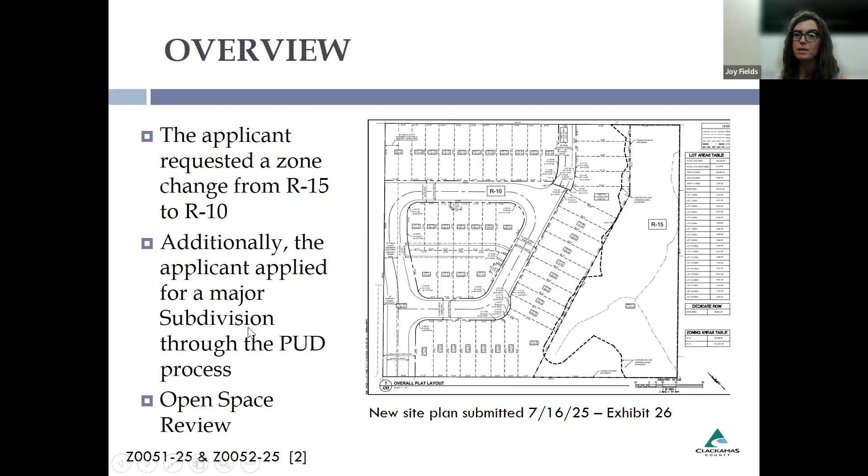Additionally, the applicant applied for a major subdivision through the PUD process. Although the applicant did not apply for open space review, the criteria for open space review is very similar to the criteria required for a zone change and a major subdivision through the PUD process. And so the staff report also includes open space review for this proposal.

Since the staff report was sent out and since the notice of this hearing was sent out, testimony has been received from members of the public. That testimony includes concern about future development to the northeast that requires public road access and the suitability of the proposed roads to provide that necessary access to the northeast.

Concerns about traffic congestion with the addition of the townhomes and additional lots. Emergency access with a road that is one way in, one way out. Environmental degradation, both the loss of trees as well as the quality and feel of the neighborhood were mentioned. Lack of parking and overflow parking from the proposed development in the adjacent neighborhood was a concern, and people pointed out the lack of transit options related to the lack of parking that is available.

There was a concern about property values and concern about access to utilities and road during construction, because there is an existing home site adjacent to the property that currently has a 12-foot road access with utilities serving it, and those utilities and road access would be underneath the proposed road as seen in the site plan.

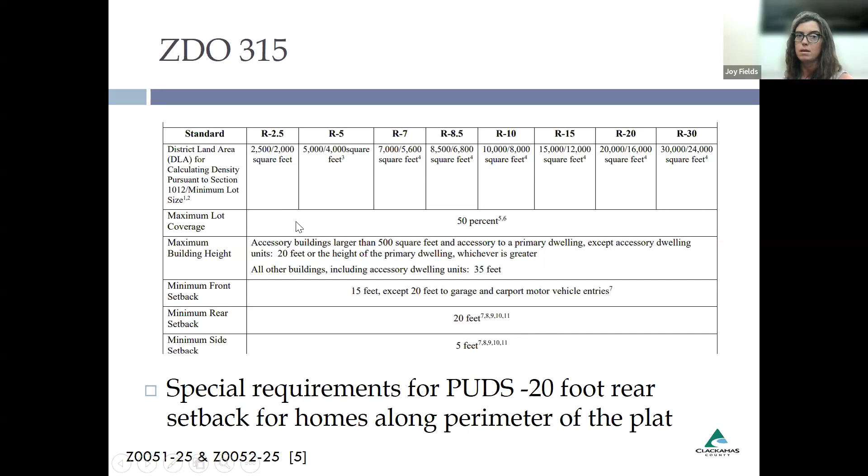Additionally, ZDO 315 talks about land area and the district land area for density of developments. This ties directly to section 1012 of our zoning code. And as it currently sits, using the planned unit development and townhome development requirements, the R15 zone would allow a base density of 32 units.

As discussed, the applicant is requesting a zone change to R10 that would allow up to 43 units when only a portion of the site is rezoned. In the original request, the applicant requested rezoning about 3 acres of the site to R10 and leaving the remaining portion of the property, which has steep slopes and is around the water resource, as R15. Under the original request, the density of the R10 zone would be met by the proposal of 43 lots.

However, through the design modification of the road, the plan for the site was changed, and the request for the R10, R15 zoning was modified as seen in Exhibit 2J. The updated plan does not include enough square footage in the R10 zoning district to get the 43 home sites as recommended.

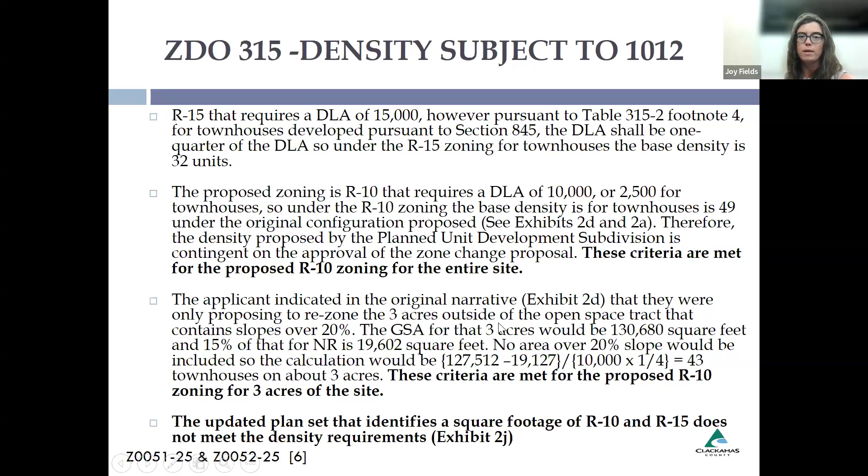The reason I bring this up is one of the comprehensive plan goals that have to be met for a zone change is that there is variety in the zones, and that steep slopes and environmentally concerned areas need larger lots. In the comp plan, these larger lots include both the R10 and R15 zones.

In the staff report, the recommendation for the zone change was a denial because there was not sufficient evidence about the transportation system safety. With the addition of evidence provided by the applicant since the staff report was written, they have addressed the transportation system safety, and the specialist found that the safety for the R10 zone was met. So staff find that the zone change as requested from R15 to R10 could be met and comply with the applicable comprehensive plan policies and goals.

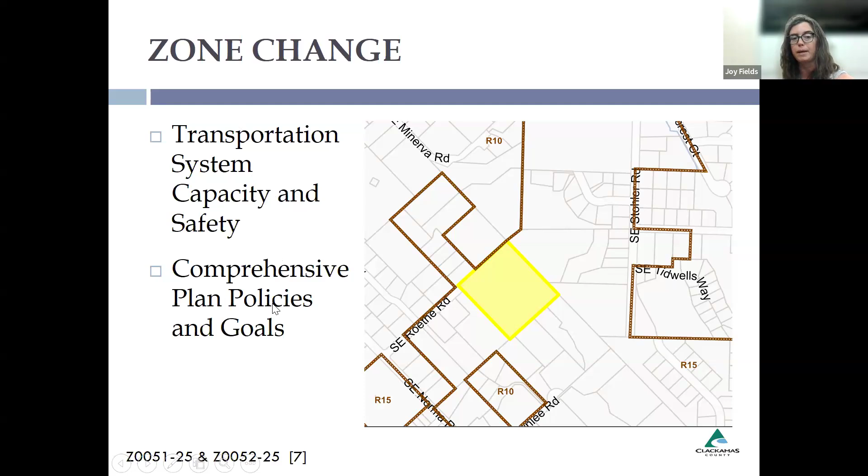The application before us is for a planned unit development. One of the reasons for that is because the comprehensive plan has mapped a resource protection open space on the property. This property is located right here and has slopes that are over 20%, as well as waterways that are regulated by the state Department of State Lands, as well as Water Environment Services. Because of this mapped resource protection open space, the comprehensive plan policies and goals require that this be looked at as a PUD, a planned unit development.

A planned unit development is a subdivision that places at a minimum of 20% of the land area in a platted open space tract. As proposed in the application materials, the applicant is proposing to designate more than 20% of the lot as open space. Designating 25 to 28% of the lot as open space as the applicant proposes allows flexible lot sizes. It also allows for the 65% lot coverage that I discussed earlier. However, it requires that the lots in the subdivision have reasonable access to the open space. There are a couple of areas that seem logical to provide that access, but it is not identified on the plan submitted by the applicant. The open space preserved in a tract has to be within 1,000 feet of all of the lots. That is met by the proposal that is in front of you today.

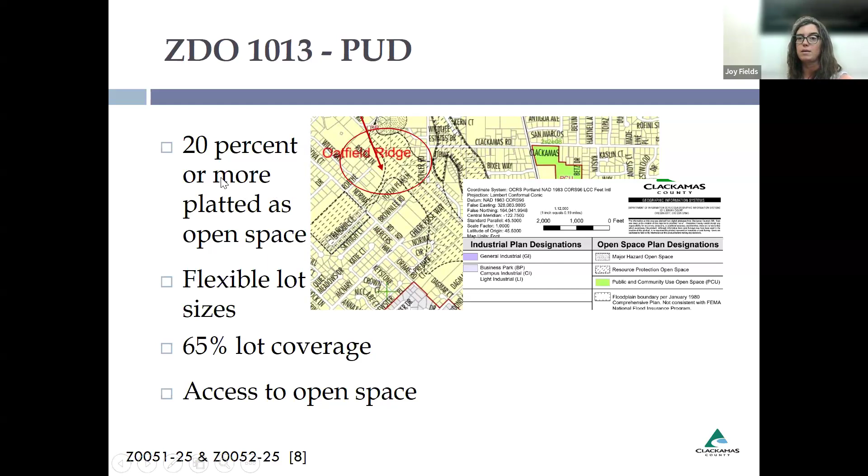Part of the open space review is not clear and objective, and state law requires that we only consider clear and objective criteria when reviewing land use applications for needed housing. Because this application will result in townhome development or housing development, this is being considered here. The open space review criteria that is not necessarily clear and objective is mirrored by both the zone change criteria as well as the PUD criteria. In the planned unit development criteria, there is a requirement that an HOA, a government organization, or a nonprofit organization hold the ownership of the land designated as an open space tract. That mirrors the open space requirements. In the planned unit development section of our code, it requires that the open space be limited to resource protection or recreation, which mirrors the open space requirements. So staff was able to use the information provided in the application to show how the applicant meets the open space criteria, or can meet it with conditions of approval.

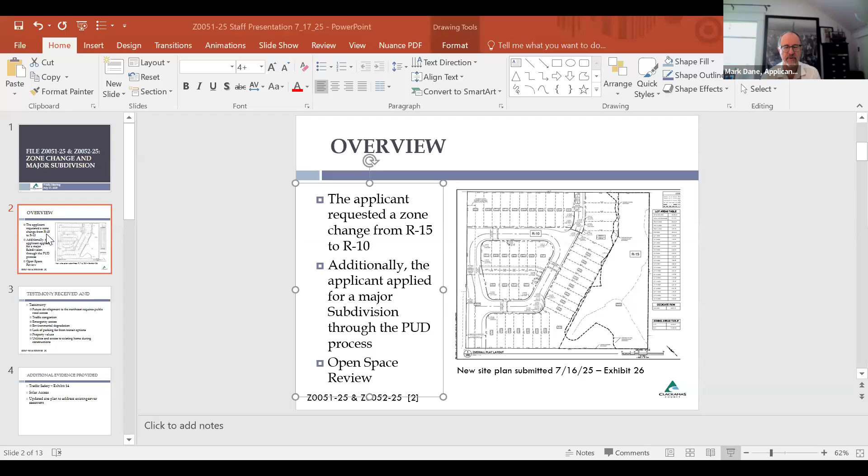I think it's very important to make sure the neighbors are heard during these meetings. So the first item, as you can see, is the future development to the northeast requiring a public road access.

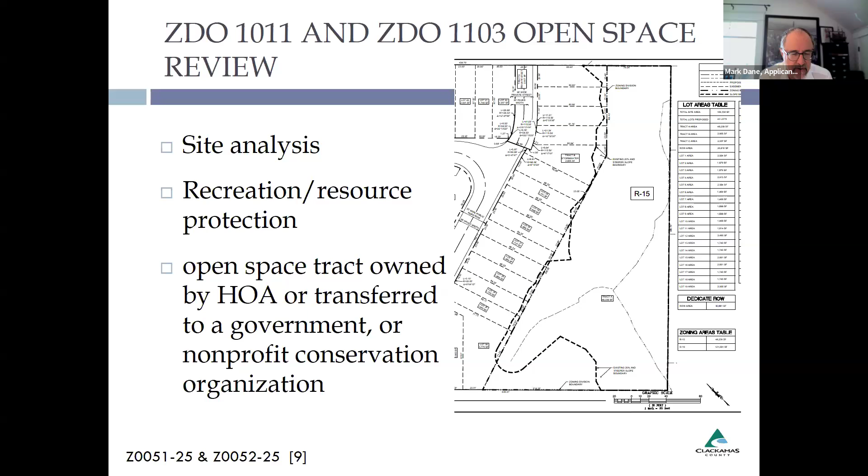I've been in communication with the property owner. He has been looking to find a buyer for this property for a while. I've been in conversations too. He did have an opportunity to develop the property when he was developing the rest of his property as a subdivision, but chose not to, essentially because it is extremely steep, 30 to 50 to 70% slopes.

My goal in providing the narrowest possible street to the neighbor was to allow him to develop his property with minimal impact. Normally a street is 32 feet wide with planted strips and sidewalks in a 48-foot right-of-way. If you tried to build a wider street on his property, given the cross slope, which is 20 to 30% in that location, it would become increasingly expensive and difficult to build the road, if not impossible.

My goal here was to provide the most accessible, most affordable, and best road for the neighbor. So we have a 20-foot road with a sidewalk on one side, which will be a buildable road on his property. I was trying to provide him with a beneficial response, a 20-foot road and sidewalk on one side, which with the cross grade as it is, would be buildable without huge retaining walls.

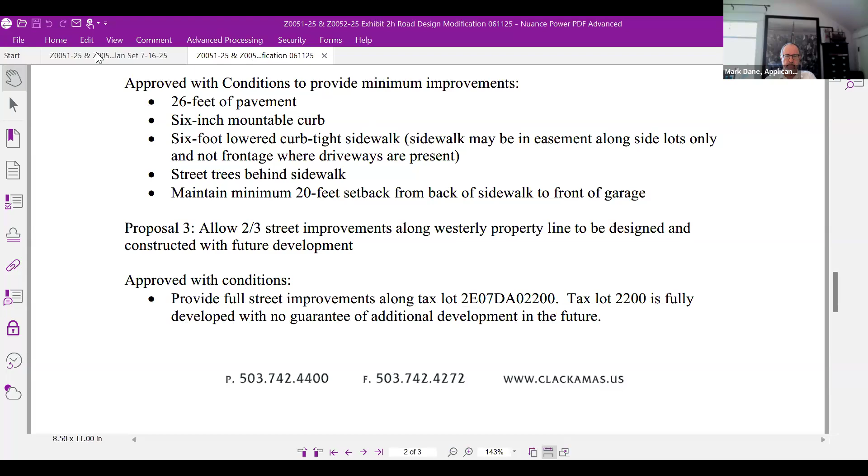First, I wanted to highlight the condition of approval for full street improvements along tax lot 2200. And then the plan set that you provided yesterday - no, the only thing that was changed on that was the lot lines along the north line when we moved everything 5 feet for the north road to get it out of the easement. The road did not change.

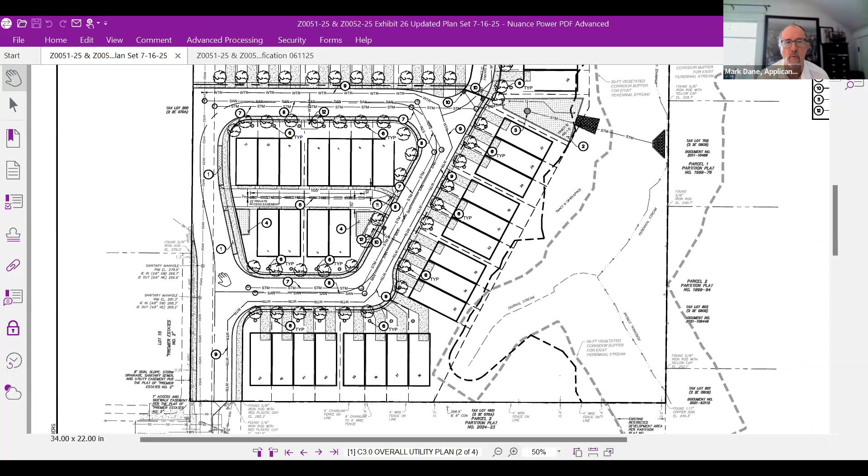You can see what we've done there is we provided a full 32-foot wide street and then crowned it over for the neighboring property owner. If we build the street as shown and then run the sidewalk, you can see it squeezes the road down to less than 20 feet.

I think the intent of the condition was to request that we put in a sidewalk at the southern portion. If you could pull that down a bit - right there, so that we would match the sidewalk that's already there off-site. I think that's what the intent was, but the way that it's written, it could be interpreted to say build the sidewalk over the street. And I just wanted to be clear that I don't think that was the intent. I just want to make sure, because once a condition is written, so that was it.

It was a matter of clarification for Ken. The condition of approval that I wrote included a sidewalk along this property boundary to have full street improvements on this part of the road. And it's not going over the road. It would need the whole development to shift to allow for room to provide the full street improvements that is required by our code. So Ken, was your intent that I move the project over? That was my intent.

Ken is the transportation expert, so I will let Ken address your question as well. Okay, I can address that. I think part of, as Joy mentioned, those engineering comments came in after the staff report, and some of that has to do with the transition of staffing and timing with everyone's schedules. But the intention of the condition was that the sidewalk and the full street improvement would be along tax lot 2200, if I'm not mistaken. Yeah. And then once your roadway shifts and becomes what we call a three-quarter or two-thirds street, then you're essentially constructing the full improvements on the easterly side, and the westerly side would be completed at some point in the future, if and when that other tax lot develops, get that right?

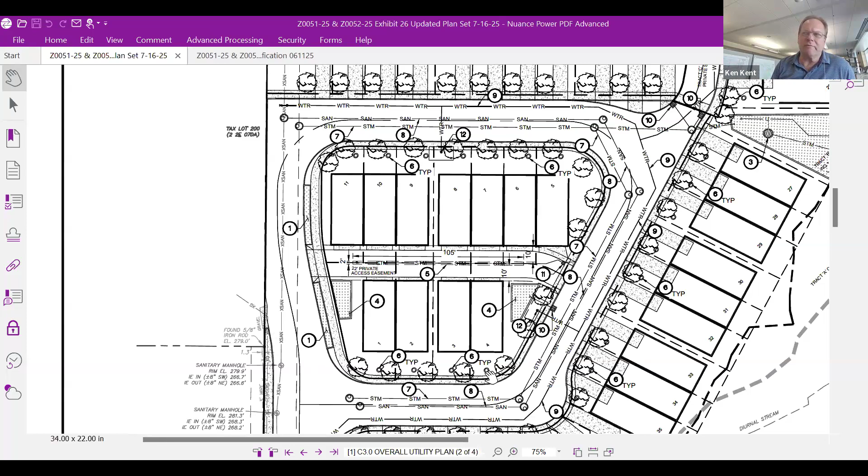Looks like 200. Okay, it might have been 200. I mean, right now it's a larger property with a house in the middle, but under zoning, theoretically it can be redeveloped. It may or may not, but this one envisions a 1.5 acre parcel. Right, so it envisions at some point in the future, it obviously has the potential under current zoning to develop. And then at that time, that property would dedicate some additional right of way and construct the remainder of this street section. So yeah, the sidewalk on both sides is limited to that initial street stub and up to the boundary of the first property.

Does that make sense, Ms. Fields? Thank you for that clarity, Ken. Yeah, that makes sense. So, should condition 2H be deleted or modified?

It could read that we have to provide the full street adjacent to the first lot. That's because it was developed in 2200. I'm not sure there's room to put in street trees as well, because our goal was to match the existing curb and existing sidewalk just to the south of the property. There's about 7 feet from the curb to the property line, so we can definitely put in the sidewalk, and normally that's not required.

We put in the sidewalk. I'm not sure we could put in the street trees in the like 18-inch to 24-inch gap behind the sidewalk, given the transition with grading and something like that. If we have to, we have to, but I'm not sure that would make a great deal of sense, and it might require removal of some of the neighbor's vegetation, which I really don't want to do. I don't need to, because of the hedge they've got along there.

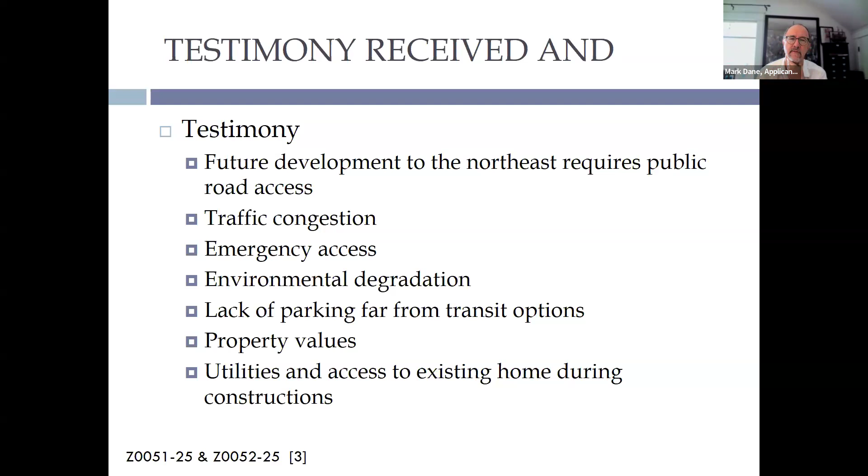Joe, would you be able to bring up the site plan again that shows the driveway locations, please? Thank you, and thank you very much for your help on this. I find it easier just to normally work with staff's materials. If you can see the driveways located along the north and then the east, essentially the outside of the loop road, you can see with the location of the driveways, it does not become possible to park anything there.

But rather than have everything front loaded to provide parking, what we did was we created an alley so there would be on-street parking around the entire middle of the island where there would be no driveway cuts. So by removing the driveway cuts and having rear loaded, we were able to ensure there was on-street parking along the entire island. We also, where there weren't any driveways at the entry, where we have the 32-foot, parking is permitted on both sides of the street there. So essentially where we don't have driveways, we have parking. What we're trying to do there was maximize the parking, but minimize the amount of impervious surface there.

We've done everything we can to maximize the parking on site and on the street without creating a conflict between the driveways and the neighborhood parking. I believe that was pretty much it. I'd like to make sure I can hear the testimony from the neighbors so I can address those as necessary.

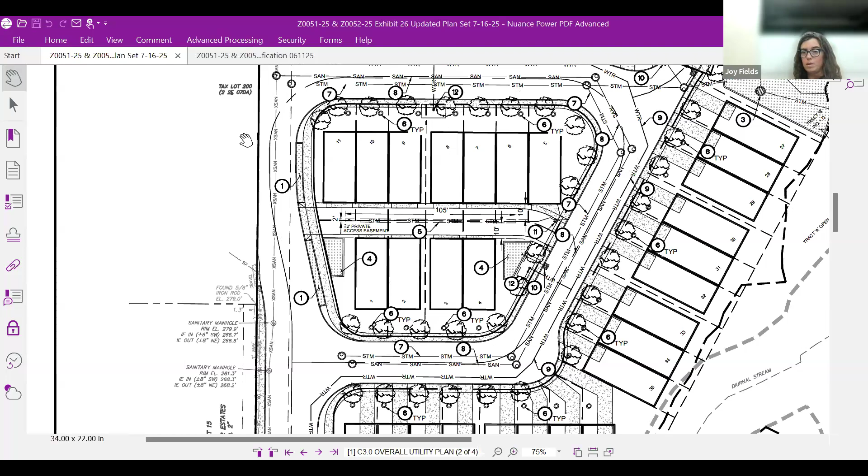Ms. Fields? One note about street trees: it is a requirement of 1007.06, and in the narrative, it sounded like the street trees were behind the sidewalk, but that you're considering these as street trees. As such, maybe we need to modify that condition to remove the street trees from that condition, but have a condition that the street trees are maintained by the property owners in perpetuity, because it is a requirement of our zoning code. Yeah, it's not uncommon, certainly with narrow streets. It's going to be in the PUE anyway.

It's going to be in the front yard, and that can be part of the homeowners association to ensure that it's enforced. So that can be part of the CC&Rs and the homeowners association. That's not a problem.

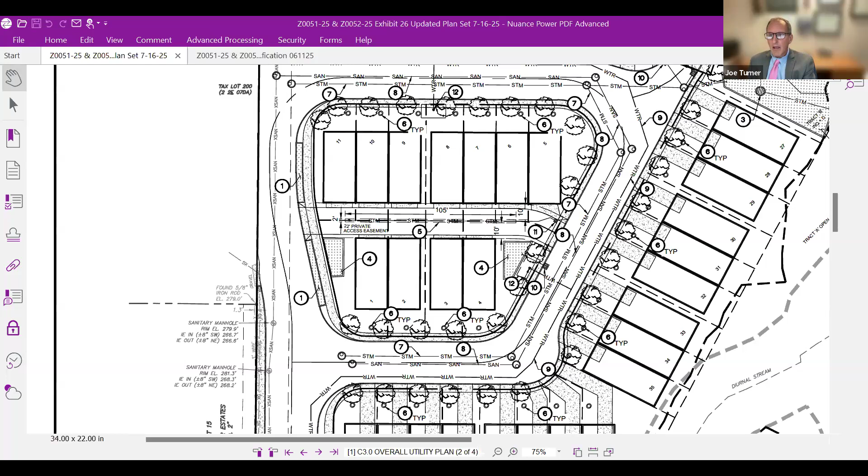Okay, can you hear me? Now we can, yes, sir. Thank you. My name is Jeff Vanderdawson. Last name spelled V as in Victor. I missed that. Thank you. No problem, it's spelled V as in Victor.

Anderdasson. My address is 915 Southwest Rimrock Way, Suite 201, Box 230 in Redmond, Oregon, 97756. My company is Vando Development LLC. I represent the property to the north, which has those properties under the name of Majestic Investments LLC. I further represent Mocker Development, both of which these gentlemen are on the call too. Mocker is a partner in the development. I provide the land use planning and civil engineering services on this project. I've practiced as a planner and professional engineer in the Portland metro area for about the last 32 years.

So I did submit written testimony, and you've asked me not to bore you with that again. But I would like some additional clarification to some of the comments that Ken had made. I wasn't able to hear it very well, but if I heard it correctly, the street extension to the north, which is one of our main questions,

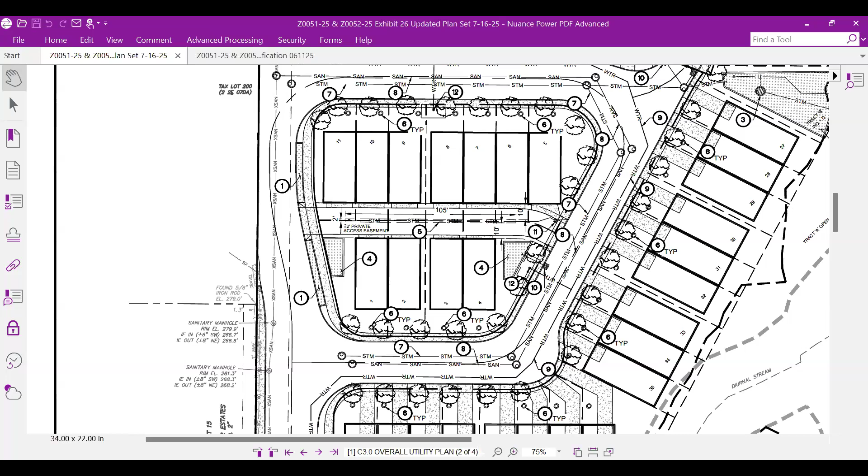I want to make sure that, because the materials that I reviewed, I didn't really see right of way widths listed in any of the comments. So I want to be clear. I reviewed the design modification request. One of the options for the main street was to build basically a 48-foot right of way.

When Joey had the exhibit up recently, and I guess first off, I'm sure I won't forget, but I want to request that we hold the record open so we have time to review all the additional information and I can respond with additional comments. So get that out of the way.

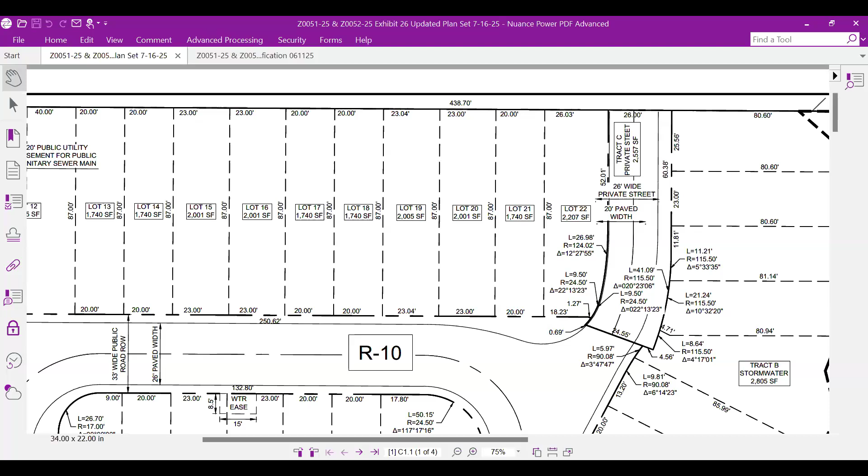Happy to do that. Bring it back up. A big question that I've had from the start, and with apologies, Mr. Turner, but I've mentioned it before. But the recording, if you could pan down lower, that shows the street width of the internal street.

That's a 33 foot wide right of way. Minimum's 48. I brought that up in my testimony. I haven't heard any comment to that. And again, I really haven't heard comment on the right of way widths, because I think we've established the fact that the road extension to the north will be public. So that addresses one of our first main concerns.

I didn't agree that an option should have been allowed for a private street extension for various reasons. I still feel that way. It is going to be a public street. Code requires it. Perfect. Okay, then I'll move on from that.

The applicant made some comments about a buildable road. We realize the grading that we would have to do on our own parcel. I appreciate the concerns, but we still would recommend that 48-foot right of way be built out to that minimum required section as spelled out in section standard detail C110.

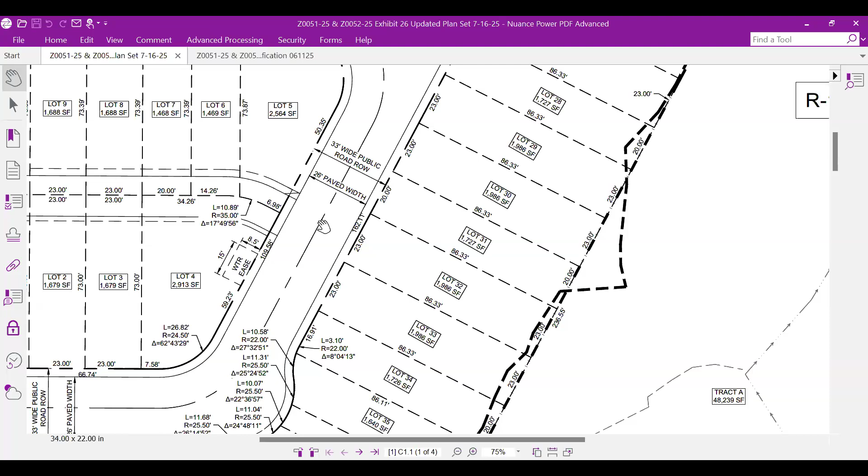What was that code section again? It's a standard transportation detail. What was the detail number? C as in cat 110. Thank you. And the road type I'm referring to is urban alternate 1.

And what was the pavement width with that? 26 feet. Okay. And again, with a right of way of 48. It's my understanding that the county approved—I can't remember if it's modification or some other similar term that the county uses—to allow the narrower 33-foot right of way and 26-foot paved road that's shown on the plan. Mr. Kent, is that correct?

Yes, that's correct. Just to clarify, as I mentioned, urban alternate on roadway standards drawing C110 spells out a 26-foot street with the right of way, but through the design modification, that allowed a reduced street width to 20 feet with sidewalk on one side. So it's 20 feet between just to the north boundary, but 26 feet throughout the rest of the subdivision, except for that street stub where there was a reduced road width from the C110 urban alternate 1, as well as the sidewalk on one side.

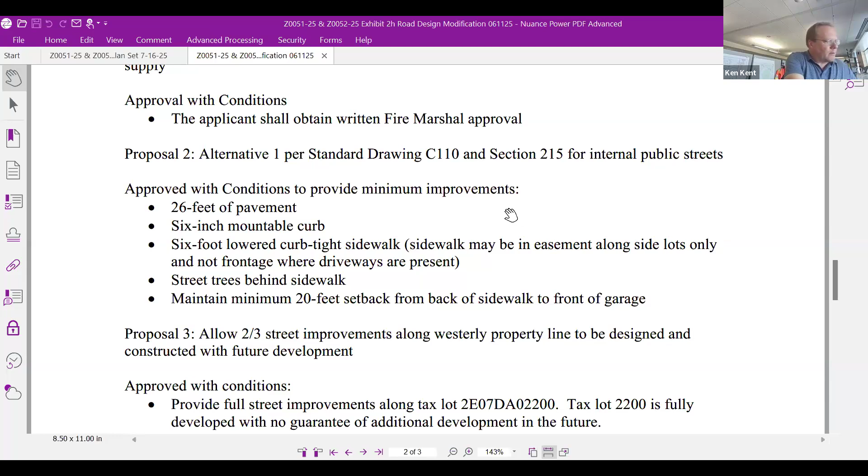I would have to look at the document in a little more detail. Part of that was in the exhibits that were submitted for the design modification, which included site plans that showed their proposed right-of-way width. We were primarily looking at the street pavement. This lists the street pavement widths and the sidewalk where street trees would be located. So I think it's a combination of this document covering that, but then the actual submitted site plan showed that. Part of our discussion was dealing with the sidewalk in the right of way as a modification, as well as the parking issue between garages.

So your intent was to approve the 33-foot right of way, is that correct? Right, the amount of right of way necessary to construct the...

Just for clarity, you might want to submit a revised version that expressly says that in your memo during the open record period. Yes, we can do that.

Ken, you mentioned the sidewalk could go into the public utility easement. I did not see a public utility easement identified in the plan provided by the applicant. And I do not see the public utility easement addressed in proposal 2.

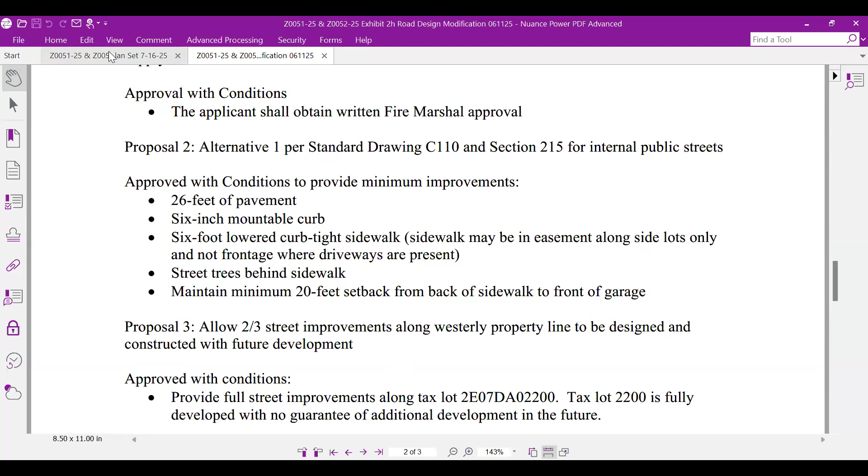Anything else, Mr. Vanderdessen? And then as we go to the north, back again, so what I'm hearing is a reduced right-of-way width. That's why I was making an issue with the 33. We couldn't really neck down from 33 to, or go back up. So if I look at that design option, it says for the private road, we've already established it to be public. So then it would have to be built at least as alternate 2.

Now, I made the point in my written testimony, my client had previous approvals. He owns 2 parcels up there. The one that directly abuts it, and then the parcel to the west of that, which both had previously, as the applicant mentioned correctly, been approved. One was a PUD, one was not. Shadow plats, which I submitted for the record, show the 14 additional lots just based on what was approved then. Again, that approval is 20 years old, if I remember correctly.

A lot of things have changed recently on density and middle housing and all of that. So the potential for how many lots we could get in there, acknowledging topographic constraints and other issues, for lack of a better word, it very well could be much higher than 14, depending on just the numbers. And there's a piece of property north of our parcel that would have to be served from this roadway also. That's why I would strongly like to make the case that I still think that larger roadway needs to lead into this future development.